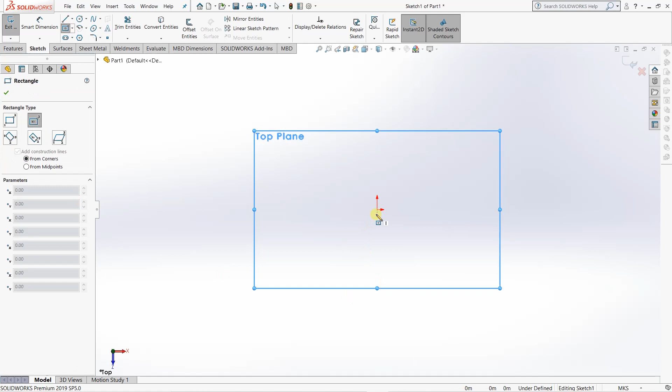So what will a beginner do first? We will try to make this slab of 25 by 64 plus 6, so 25 by 70 slab. First we will do it on the top plane, sketch, rectangle. Obviously he will forget to change the dimensions at first, so 25 by 70.

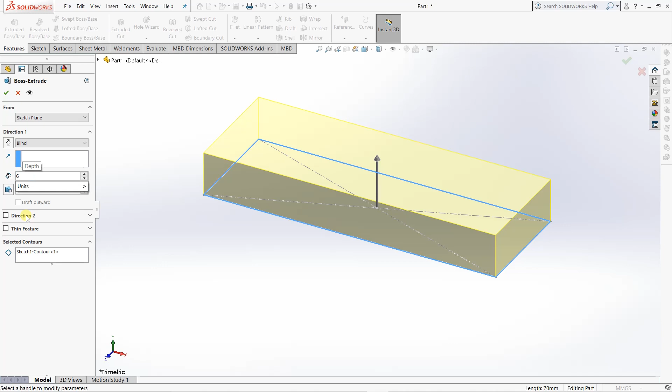Then we will exit the sketch and extrude the whole sketch to a dimension of 6.

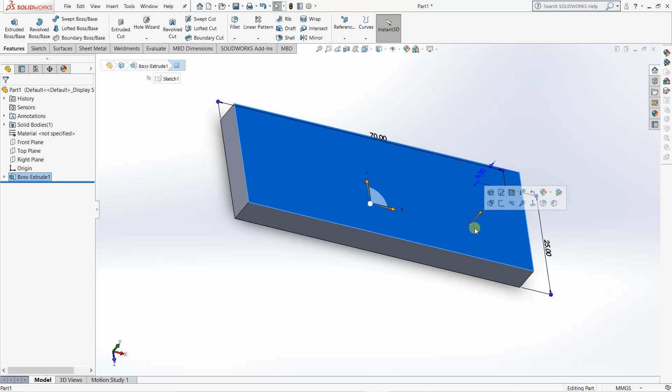Then he will create a slot, 13 by 20 as the linear length, with a semicircle here.

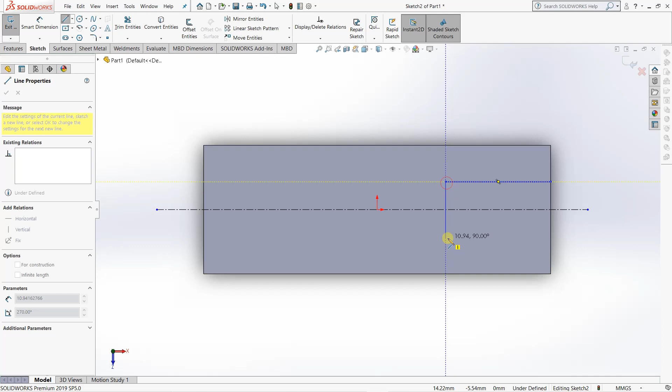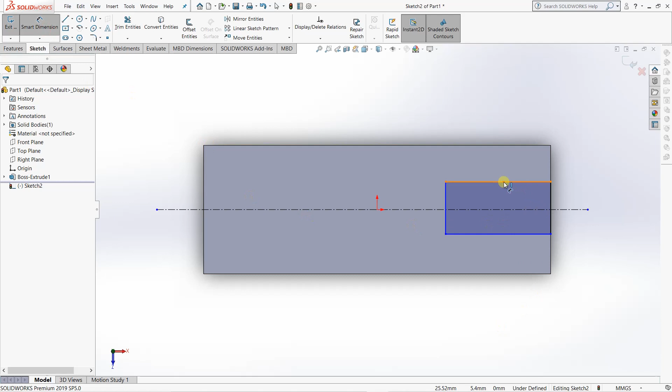Sketch, normal. The dimension is 13, and on the right, 20 linear length. This dimension is 13.

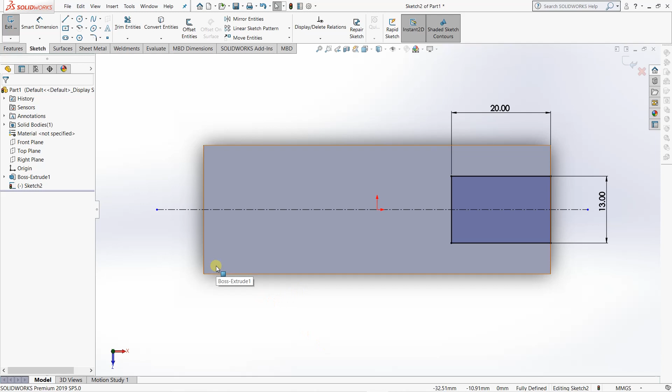Suppose a beginner is able to give the constraint command here, then we draw one circle with the three entities.

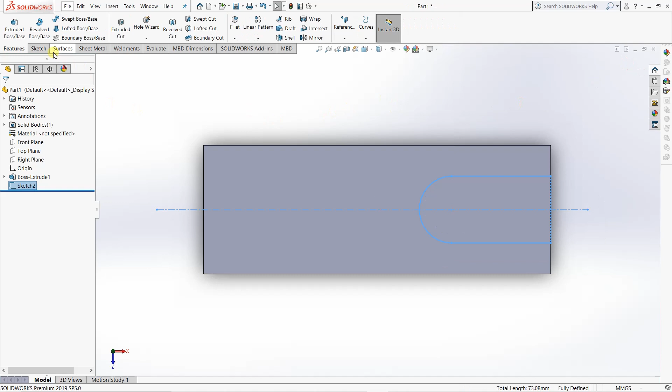With the scale, then we will use extrude cut here, for a length of 6, or we can select through all. Okay, this is the first slab we will create.

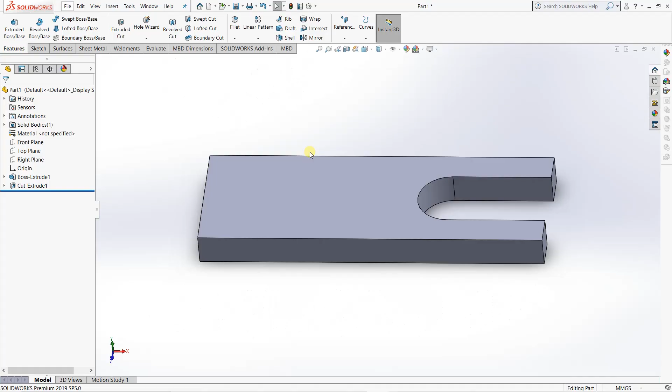Then we will create this part. How can we draw it? By clicking on this face and then sketch. Let's create a center line first.

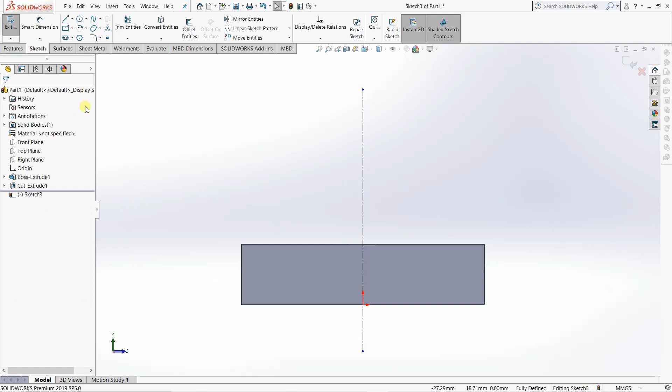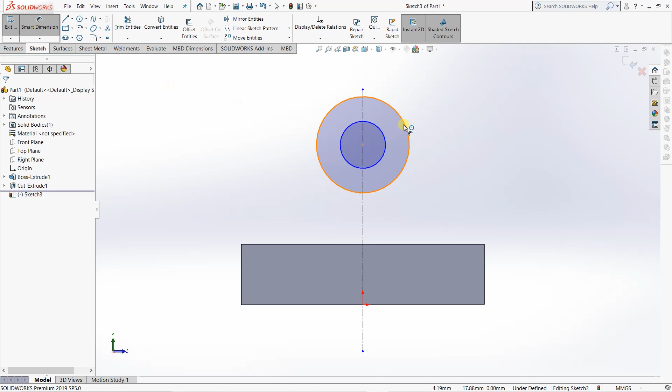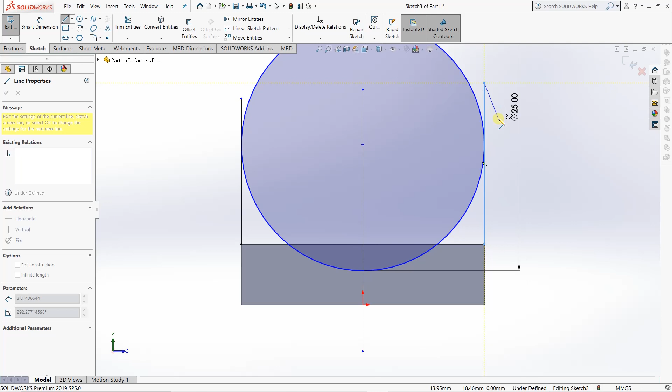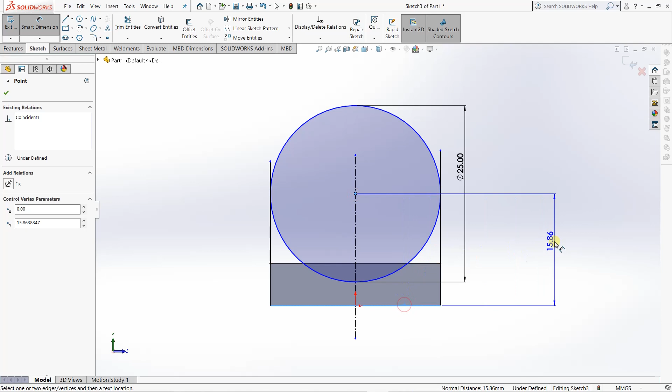The radius here is 12.5, so the diameter will be 25. What is the center distance? With the bottom side of this slab, the distance between the center of the circle and the bottom of the slab is 18.

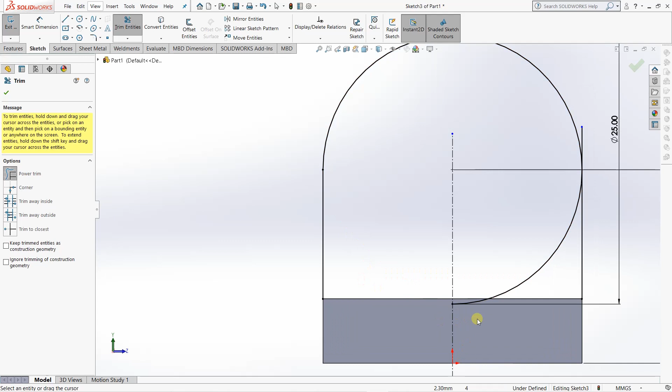So center of this, plus smart dimension, center to bottom is 18. Now these three entities are selected for the power trim. Just click and drag over the line we need to trim, this one, and this.

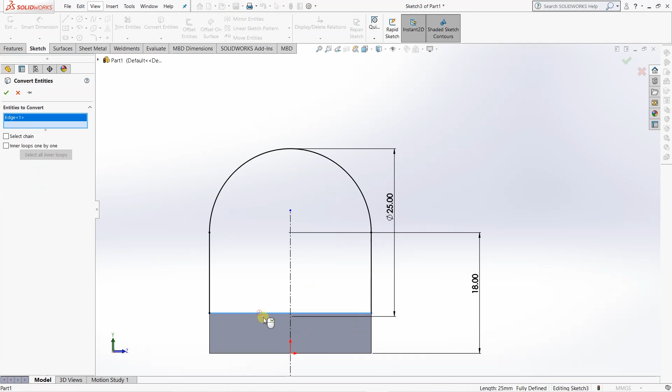Now we'll check whether our sketch is fully defined. Yes, it is fully defined, but for the extrude command, we need the sketch to be a closed figure. So we will convert entities and select this edge. This is our closed figure.

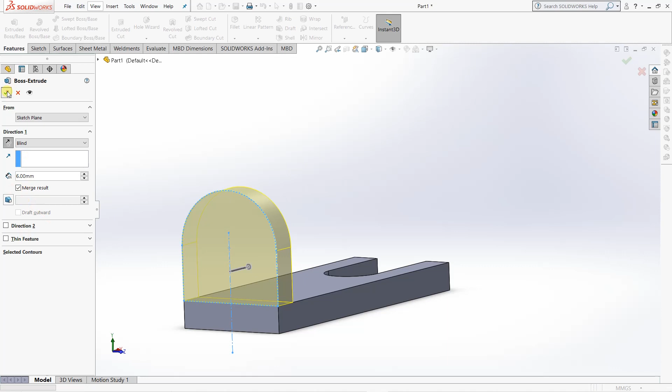Now we will perform this extrude cut along this face. We will select now.

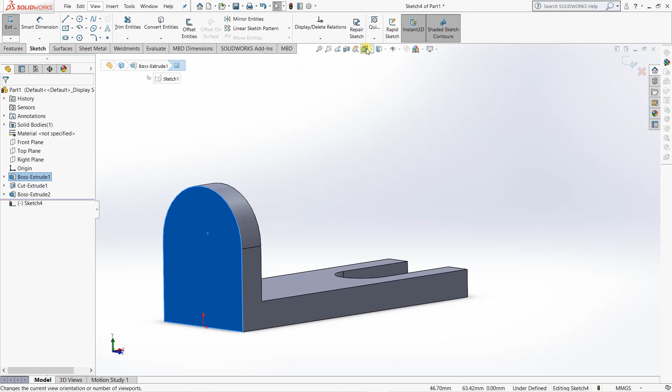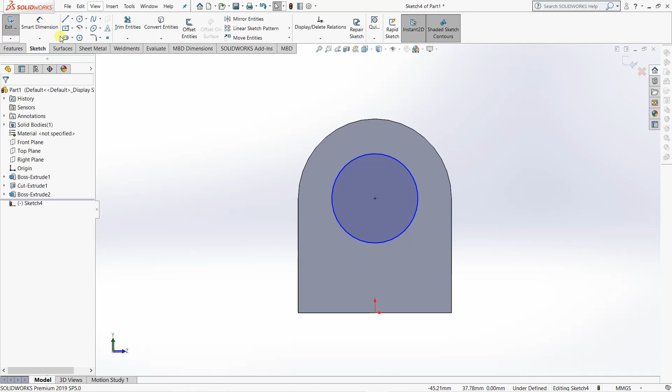Let's make it concentric so that we may not have to give the dimension here. Is the figure moving? Center point moving? No, it is not moving since we are given the concentric constraint here. So let's give the dimension. The dimension was 13 diameter.

Now our sketch is fully defined. Go to exit sketch and we will go to extrude cut. We will select through all. We can select the blind also, and through all also.

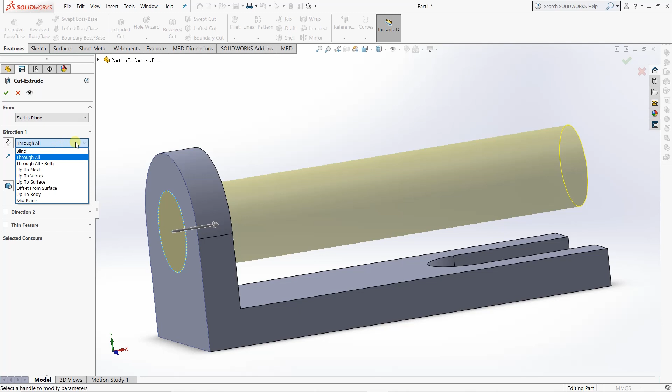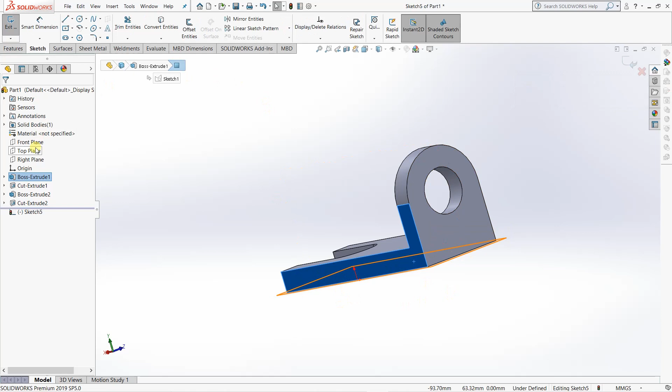Now that this one is created, we will move on to this lower part. For that, we will select the back of the part, back face of the part, and select the sketch. Then normal to the sketch plane. So the part must be here.

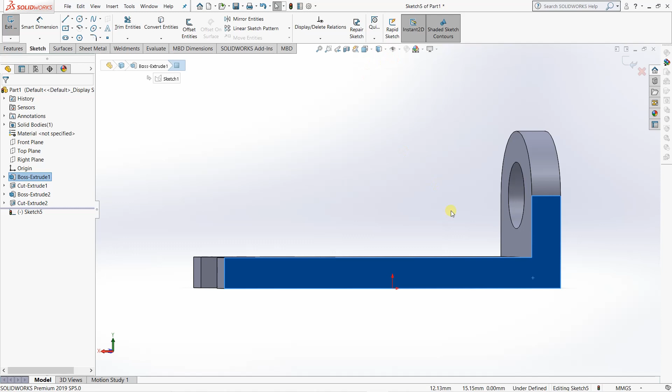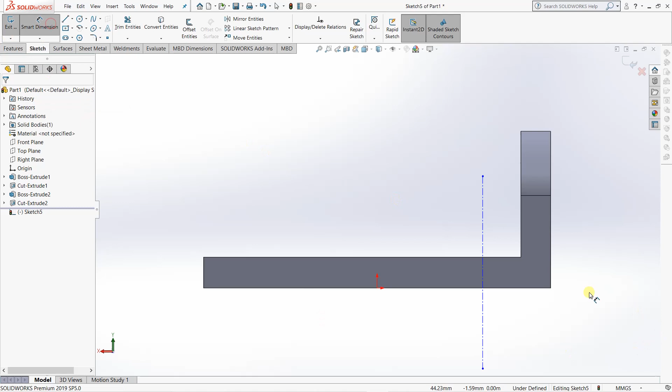With the dimension, let's create one. The outer circle diameter is 25, the same. So first we sketch a center plane, a center line. Then we can give the dimension at 12.5.

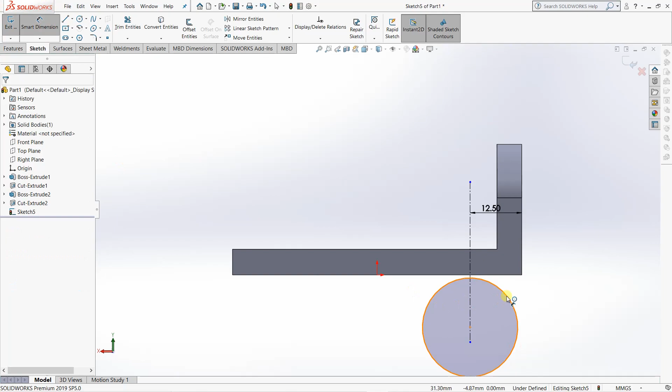We need to place the center of the circle on the center line. So let's do it here, and my dimension 25. And then the distance between the center. What they have given is the distance 18 and distance 30.

So from the bottom face till the center point of the upper circle, the distance is 18, and the distance between the center point of the lower circle and the upper circle is 30. So we can calculate the distance between the lower part of the slab and the center of the circle. It will be 30 minus 18, so 12. And this will be 12.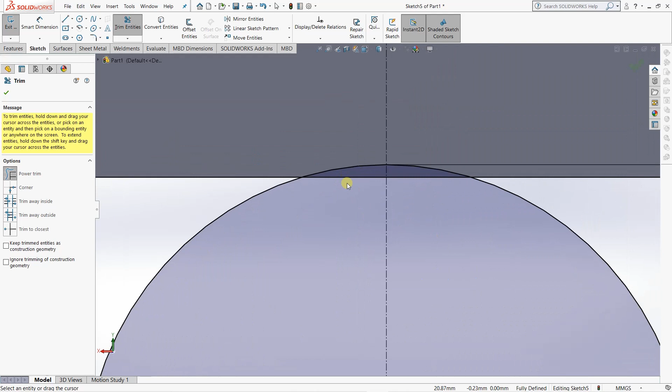So we will use the trim, power trim will be okay. This one we want, we don't want this line, this line. So we have created a closed figure. Check if this sketch is fully defined. Yes, it is fully defined. Go to exit, exit the sketch.

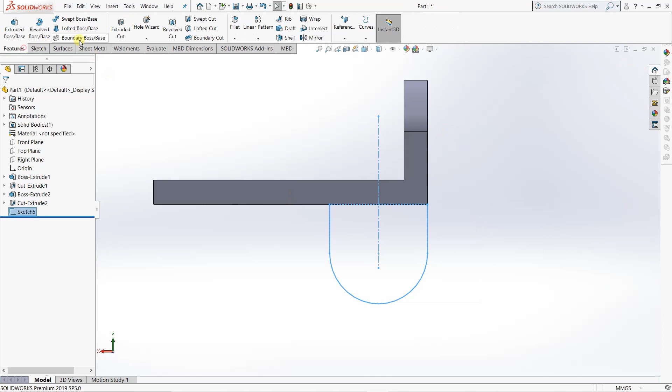The features, extrude boss base. Next, the plane is fixed. Then again on this face, the beginner will create a profile so that we can extrude cut the circle normal to projection.

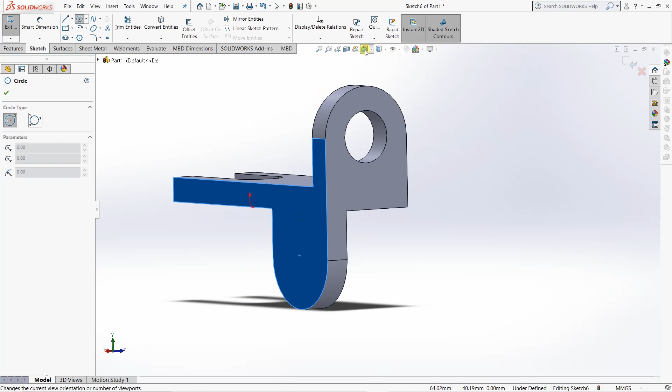We will make this and this. We will select the circle and the curve and make it concentric for our edge, and yeah, we have calculated it well here.

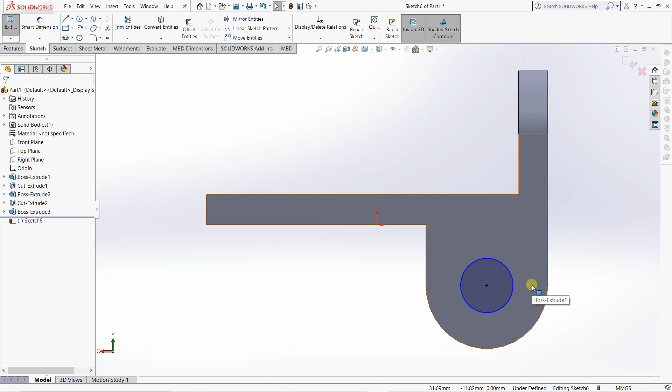So this is smart dimension, here. So we are getting dimensions given, so that means there's another entity where we are missing. It is basically the diameter of the circle, another 13.

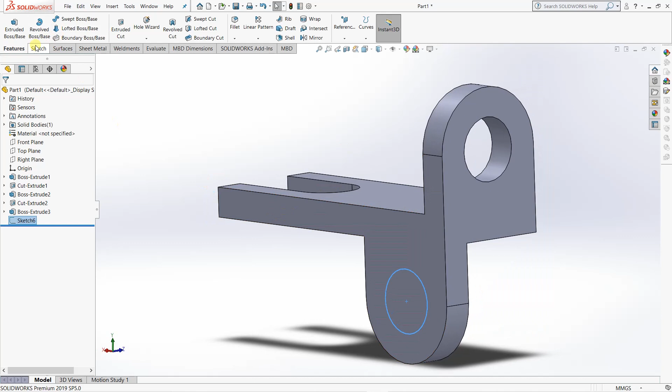Okay, we take this space, and then at last the beginner will extrude the sketch, and then he will say my part modeling is completed. So how many commands have we used? Boss extrude 1, boss extrude 2, boss extrude 3, and 3 cut extrude. So we have used a total of 6 commands, meaning 6 times we have done the operation.

So let me show you how the professional will do this part. Let's minimize, go to new, double click on part. Now the professional will look at this sketch, at the diagram, and he will look at this orientation, this XYZ axis, which is given to us in the diagram.

So in our childhood, while drawing the graph or any type of diagram on the sheet, we used to take the x-axis along the length and y-axis along the width. That same point we will see here. On the top plane, the length will be x and the width will be y. And above the top plane, the z-axis means the height. We will give the height to a slab or to a part.

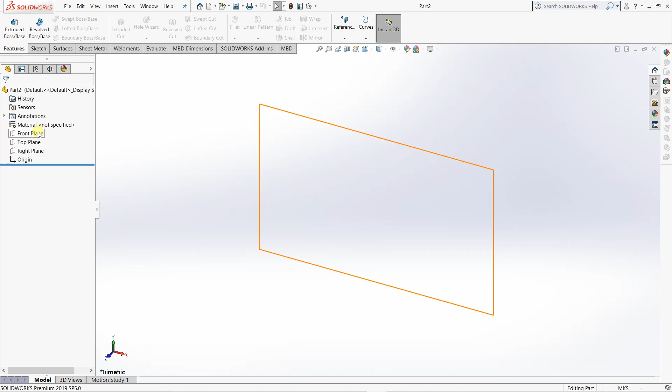So this xy means we must sketch that part, the below semicircle part, on the top plane. So let's create that one. XYZ, XY on the top plane. The top plane sketch. Okay, so let's create this one first.

Remember that we need to use only one extrude command to extrude the whole feature. So let's do it. Okay, same, the same mistake I made as a beginner. Edit sketch. Okay, what are the dimensions?

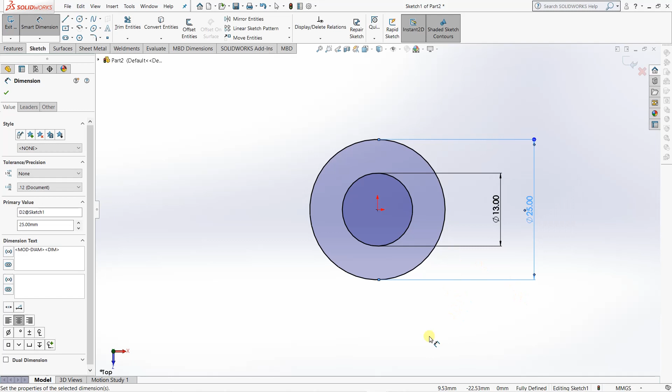13 and 25. Smart dimension, 13, and this one will be 25. Now from the quadrant point, let's create this point.

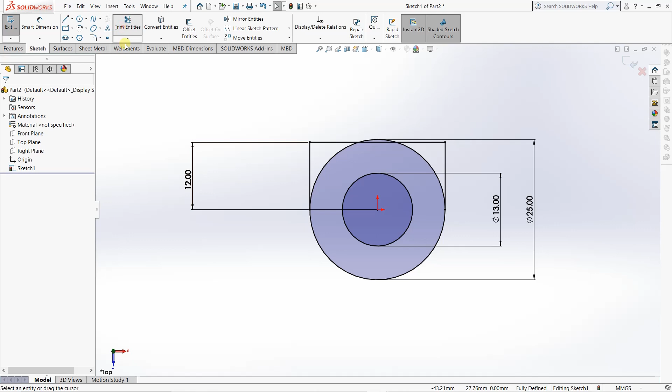What is the distance between the center point and the bottom of the slab? It is 12, which we have calculated. Then we need to trim it: this one, then this one, then this one.

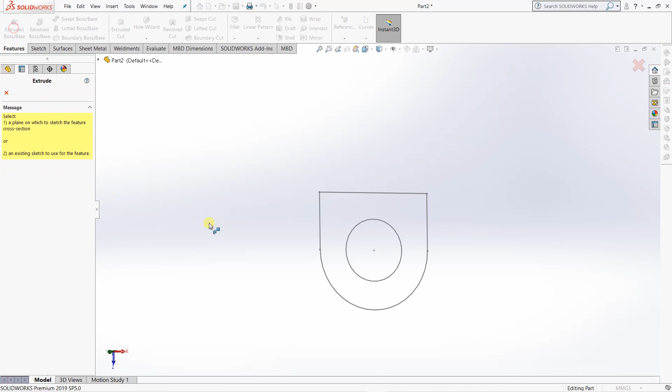We have a closed sketch here, and our sketch is also fully defined. So let's exit the sketch and use only the extrude command. Now you will see that the whole sketch is being extruded.

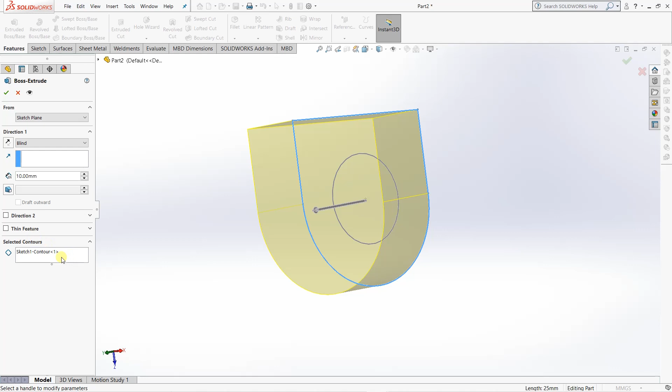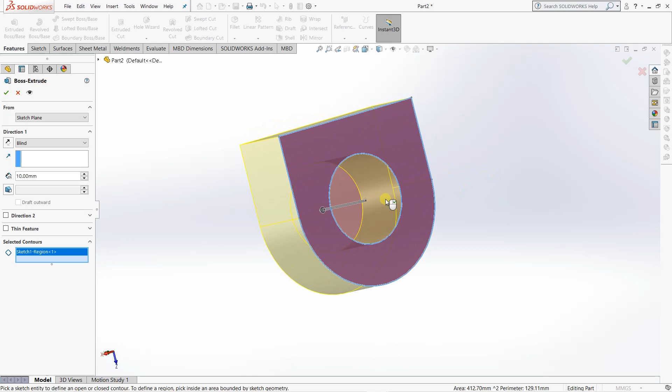We need to eliminate this smaller circle. So within the selected contours option, we will right click and clear selections, and then select the contour. It is automatically showing here, but if it does not show, just select this contour. Select the contour and then give the dimension as 6.

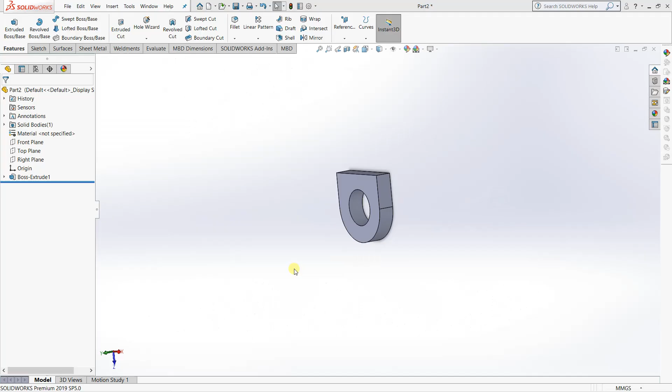The X, Y, Z origin point is placed according to our diagram. The origin point is here on this face.

So we have extruded at the back side, and from the back side, on the upper side, we will select this face and create this slab.

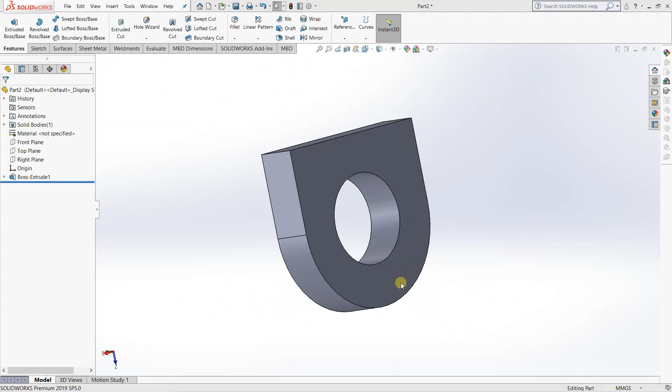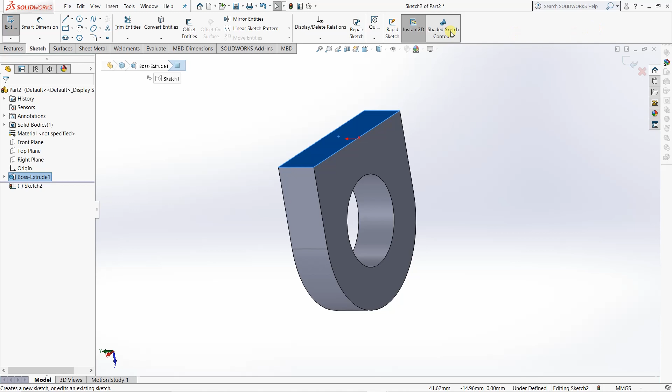So how will we draw? Select this one and this sketch, and we will draw the slab in this direction, according to the inner part. Because the origin is placed at the inner part of this profile, we will extrude at this point. So let's do it.

The length is along this and the width is along the y axis. This one is from here, and from here, height is from here. Understood now.

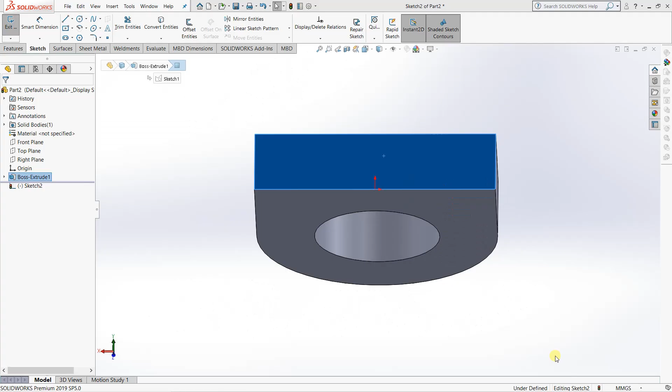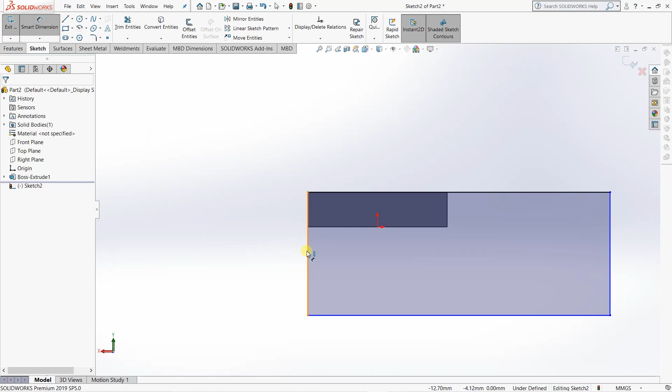Normal to plane. We select the corner point rectangle. Right, suits our requirement in this way. Give the smart dimension as... what was the dimension? This one is 25, and 64 plus 6, that is 70. This is 25 and this one is 70.

By double pressing the middle mouse button, by double tapping it, you can zoom all. And then we need to create this slot.

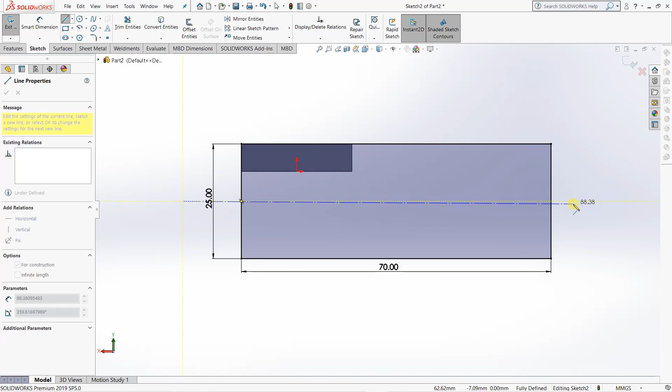We first draw a center line. We create this slot. The dimension was 13, and then the quarter point.

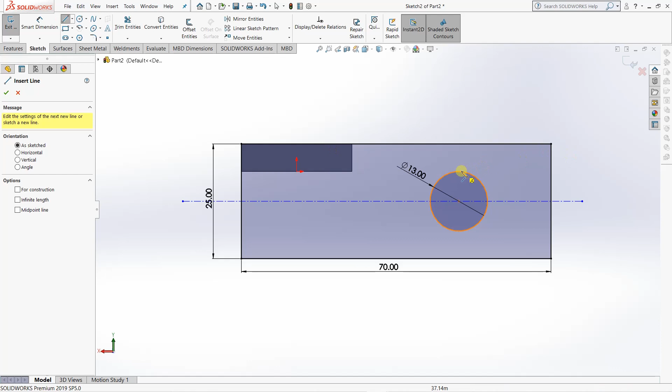The distance between the center of this circle and the edge is 20. So we will give the dimension and our sketch will be fully defined.

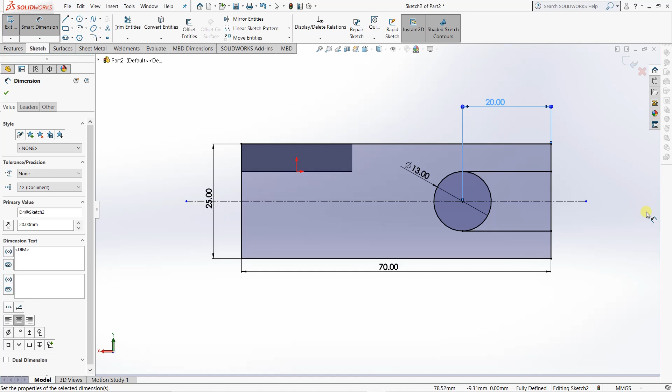Let's now trim it. Power trim, just click and drag. We also need to trim the line in between this slot - this line, this one, and this one.

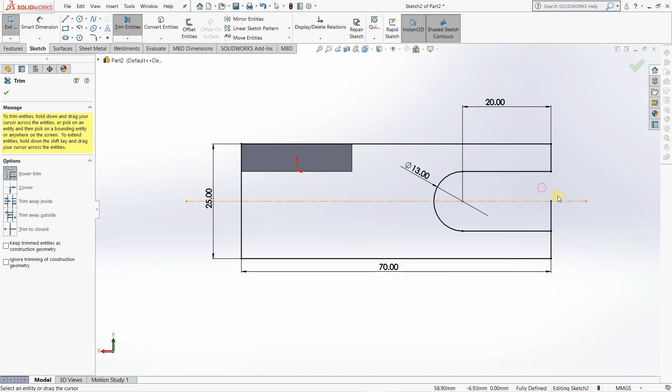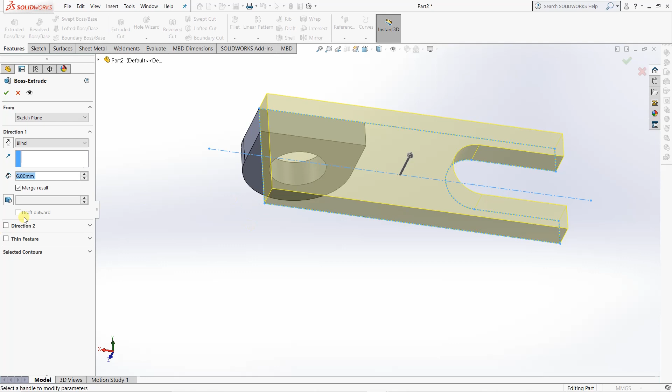We have created a closed figure. Exit the sketch. On top of that, we need to extrude it. Extrude it by 6. It's already done. We have used only two extrudes.

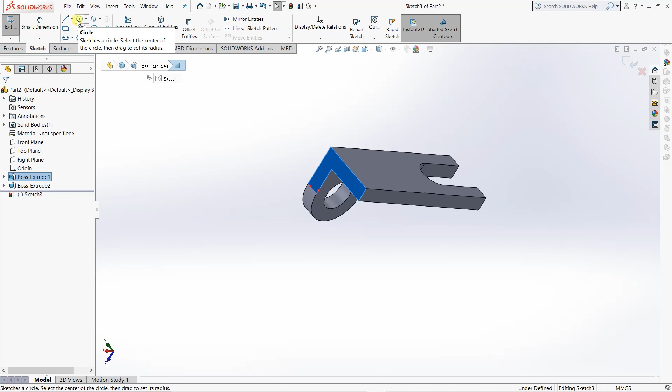Now let's create this last part. We have to select this one, go to sketch, go to center point circle, to this point. How was our sketch? Yeah, like this.

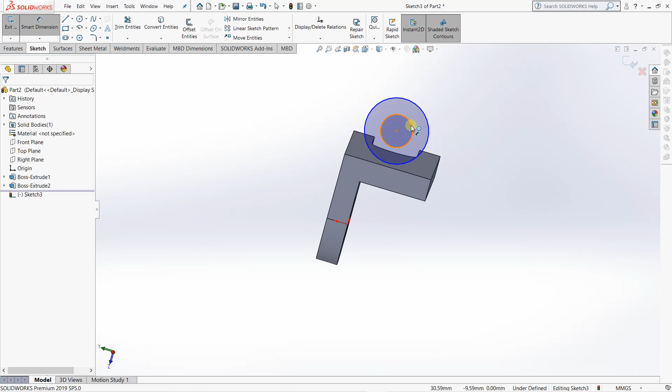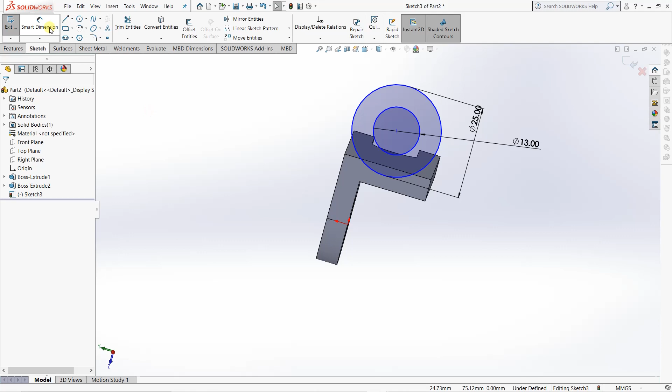Here somewhere, and then two circles of diameter 13 and 25. A distance between the center and the lower point, lower edge of the slab is 18. And this 18. Now let's close the sketch.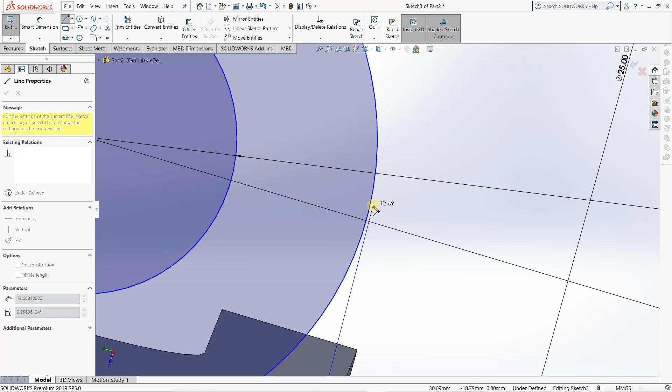Click in here, and then convert this entity here. We have given the 25 dimension.

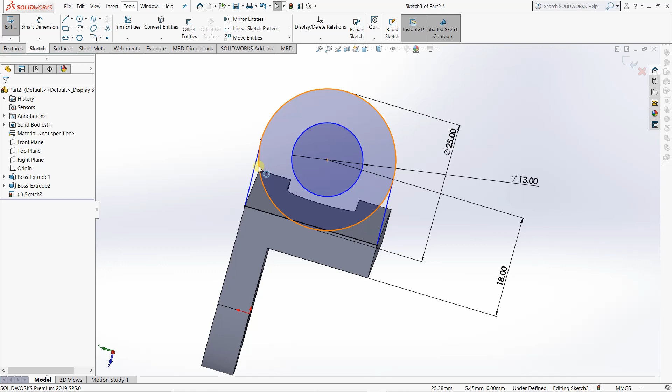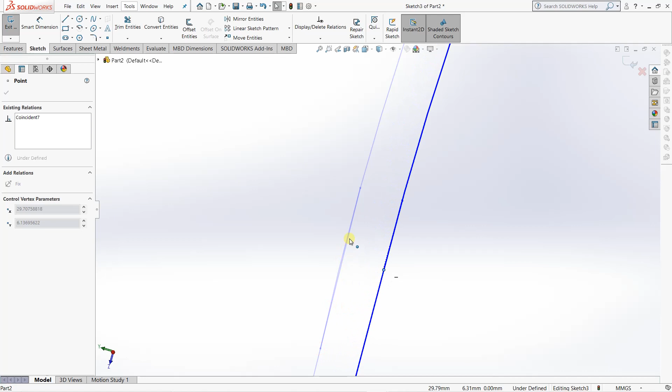Now what's remaining? Let's trim. Is the sketch open? Yes, it is open. Still our sketch is under defined. So what's remaining here? Let's click on it and try to drag. Nothing is happening.

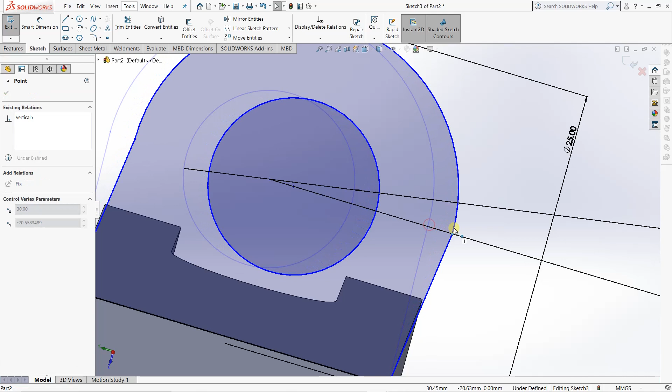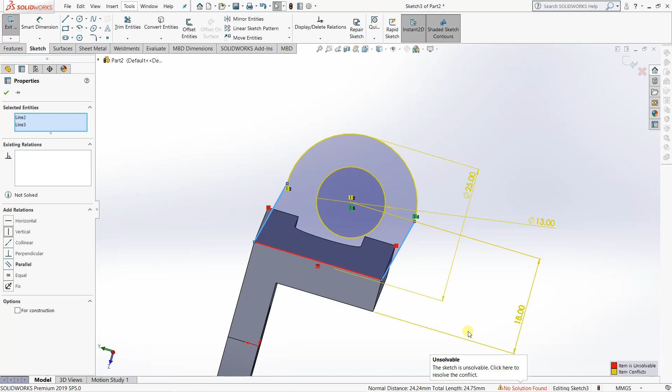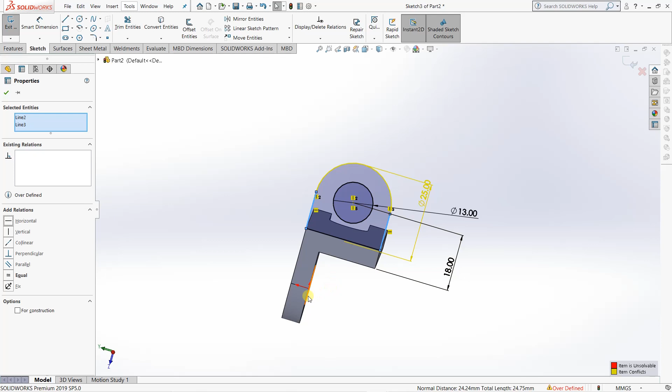We can see the constraints are not applied properly. So we will select this and this line and make it vertical. Oh, something went wrong. Actually, select this and make it horizontal. Why have I selected horizontal? Because that's the origin here.

According to the origin, let's view by this. Normal to the plane. Now you can understand. According to the origin, this line is horizontal. So that's why we have selected the horizontal relation.

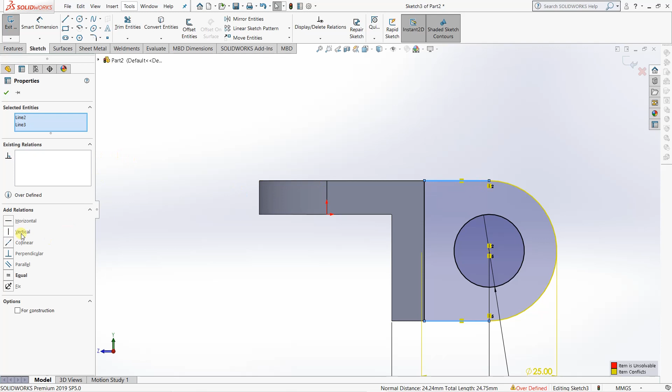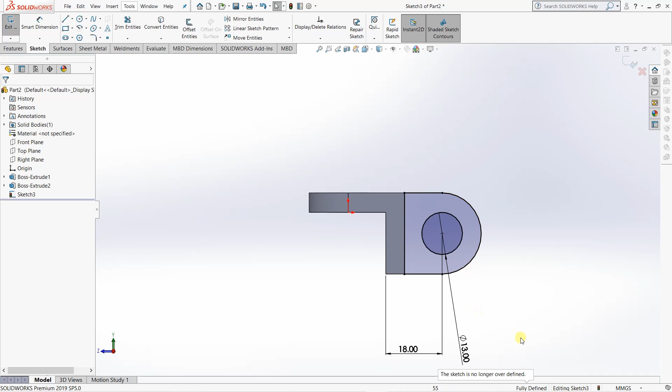Now let's see what is overdefined. We can say that the dimension is not needed actually, because since we have given the whole edge here as 25, there is no need to give this dimension. So our sketch is fully defined, and let's exit the sketch and use the extrude feature.

Now it's displaying perfectly. We need to change the direction by clicking here and click OK.

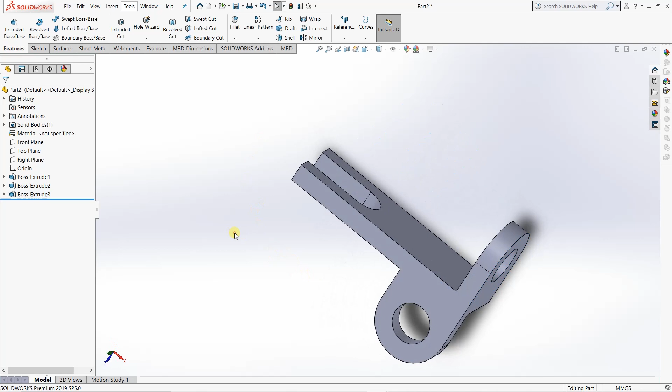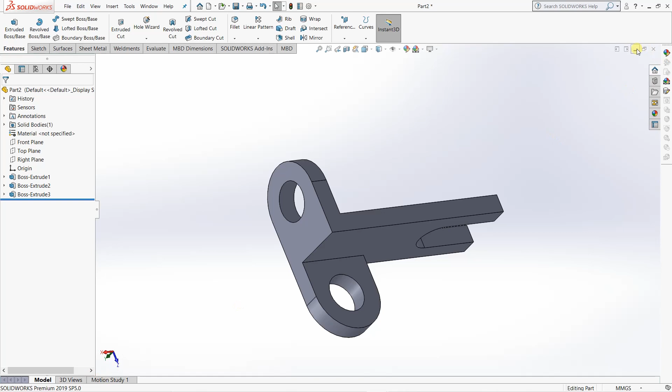So this is how we do it professionally. We have used only three commands here, whereas in a beginner's way, where is that one? Yeah, in the beginner's way we have used six commands. In the professional way we have used only three commands. So that's how you need to think about the component, think about the features which are needed.

Save. Try to make the part with the minimum number of operations, so that we can reduce the size of the file also, and we will not waste our time too. Okay, so that's all for now.